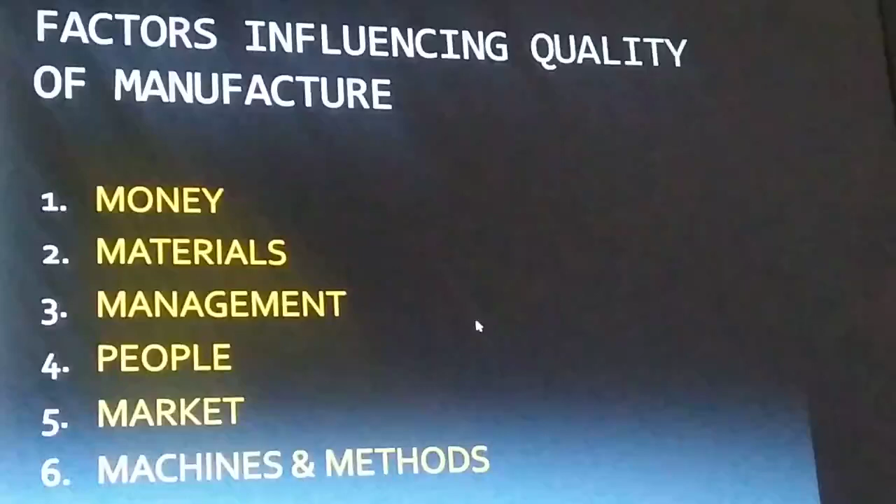These are the 6 major factors that influence the quality of a manufacturing process: money, material, management, people, market, machine and methods. Let us see in detail what is the role of these factors in maintaining the quality.

First of all, money. Money is the most important and essential factor that influences the quality of a product, because money is involved in every stage of production. In this present day of tough competition, companies are always forced to invest a lot of money in maintaining the quality of the product.

Example: automobile sectors, Maruti Suzuki and Hyundai. They are companies producing cars. Maruti Suzuki is economy wise better, and Hyundai quality wise engine parts are much better. So you have to prefer according to the price and also the quality. This all depends on the money factor that is affecting the quality of the products.

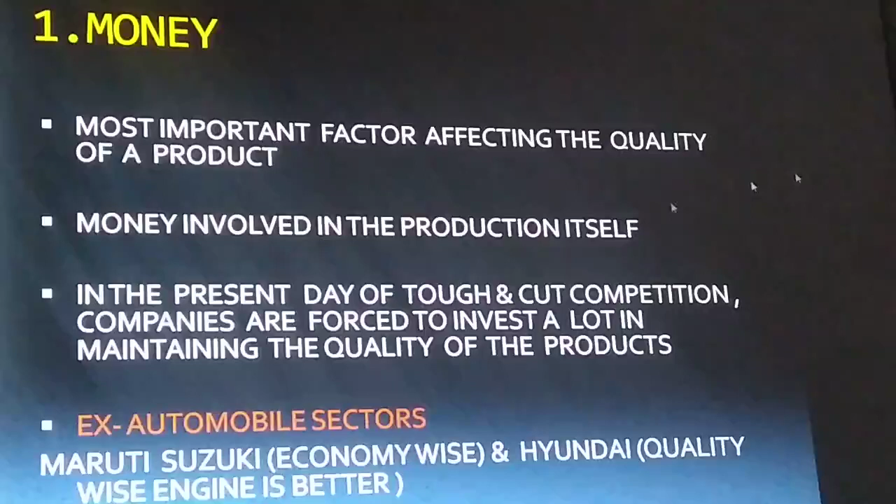Next is material. The raw material is a very important criterion for producing a high quality product, because raw material is essential in every production process. When the raw material is of high quality, then the products are of high quality.

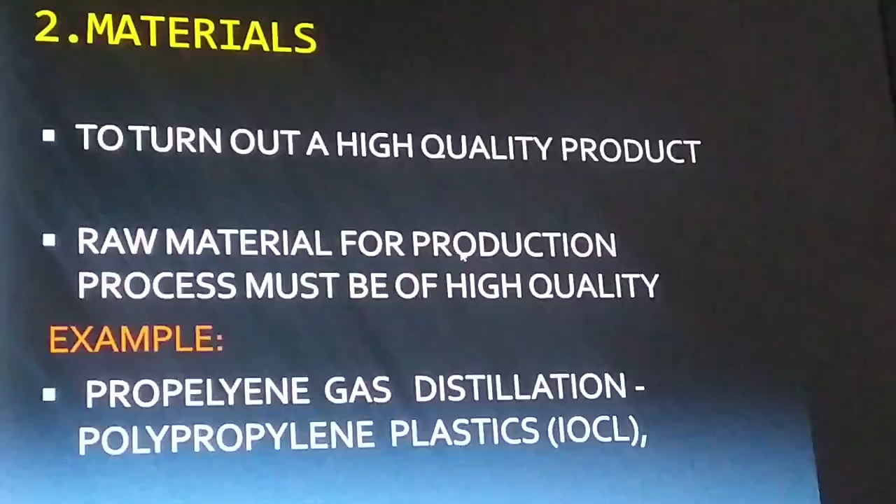For example, Indian Oil is a public sector organization, and it takes propylene gas as the raw material to produce polypropylene plastic. The layout can be given as below: the propylene gas is distilled to form polypropylene, which is a high grade plastic.

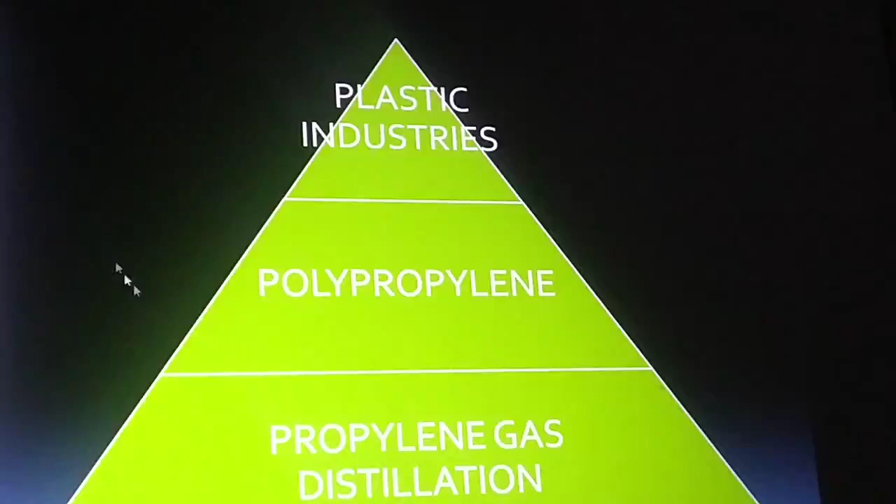Every plastic component with high quality is made up of high grade polypropylene. So propylene gas is the raw material in Indian Oil, and it produces polypropylene as a product, which becomes the raw material for many plastic industries producing household utensils, chairs, tables and similar plastic components. So raw materials should be of high grade quality in order to maintain the quality of the products.

Next, management. Management has a very important role in maintaining quality control and the maintenance of objects. Quality control and maintenance programs should have support from top management, meaning top management should always support maintaining the quality.

The management should be quality conscious, not quantity conscious, because when management supports these quality control programs, the products will be quality specific and the company reputation will be enhanced, so that customer satisfaction is achieved and it will benefit the company. So the management should always support quality control and maintenance programs to maintain high quality products.

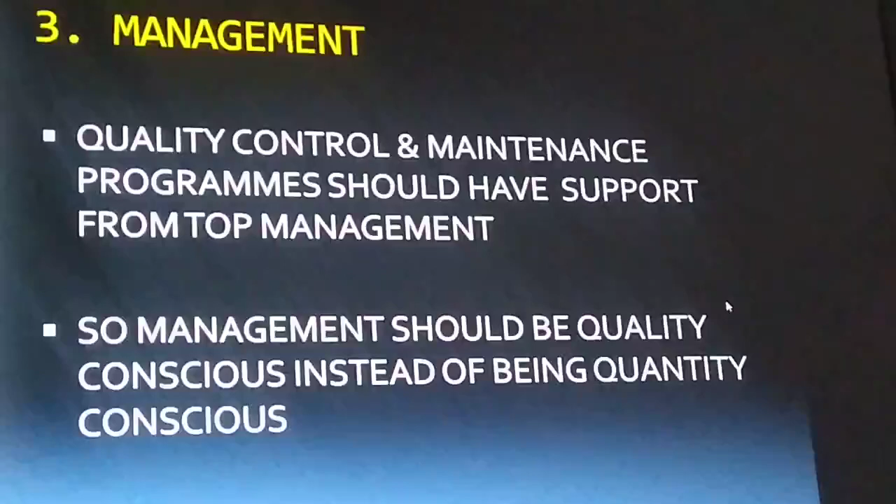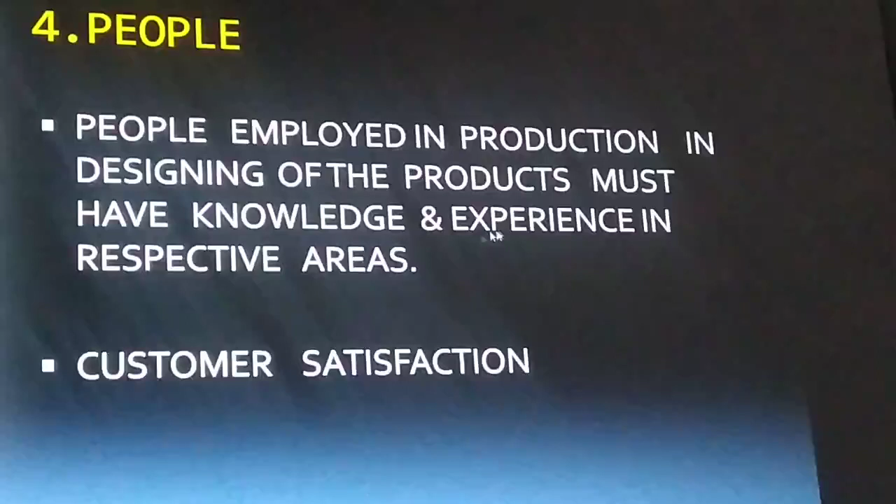Here, people means employees employed in the production process in the companies. The people employed in production and designing of products must have knowledge and experience in their respective areas, because this knowledge, idea, and experience in all the respective areas of production will make high quality products, so the products will be error free. There should not be any error present, and the product will be widely acceptable by customers, so that customer satisfaction will be fulfilled.

Next, market. A market for the product must exist before the quality of the product is emphasized by management. You have to check first whether there is demand for that product or not, and according to that, take the product forward for quality maintenance purposes. For example, there is no demand for AC or coolers in cold climates because we are not using them.

Similarly, there is no requirement of room heaters or woolen garments during hot climatic conditions. So a company producing hot woolen garments, if they set up during hot climatic summer conditions, it may not run. So it depends on market conditions and environmental conditions also to have product demand.

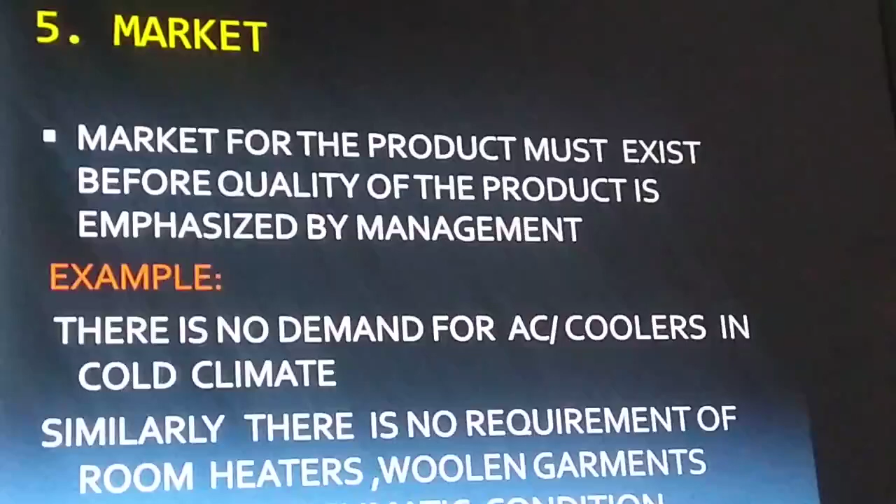So that's why market is an essential factor before going to maintaining the quality of the product. First the market should be inquired about - we should inquire about the market or demand of the product, then we will switch over to the quality purpose of the product. And the next, last one: machines and methods.

To maintain high standards of quality, obviously high upgraded technology is needed, and this is done by new, upgraded machines. So companies always invest a lot of money in new machines, following new trends of technology and new procedures. So machines and their methods play a very important role in maintaining the high standard of quality.

For example, in Bhubaneswar there is CTTC, the Central Tool Room and Training Center, famous for producing very high quality products. Nowadays it is using a 3D printing machine, the most advanced manufacturing process, using 3D printing technology to produce high quality and complex designs of products. Any design you give, it can produce by a layer-wise manufacturing process.

Similarly, different oil refineries use advanced technology to refine oil from crude, like ONGC, Indian Oil IOCL, HPCL, BPCL - all producing refined oil using new and advanced technologies. So these technologies and machine methods are very important in order to maintain the quality of the products they are producing.

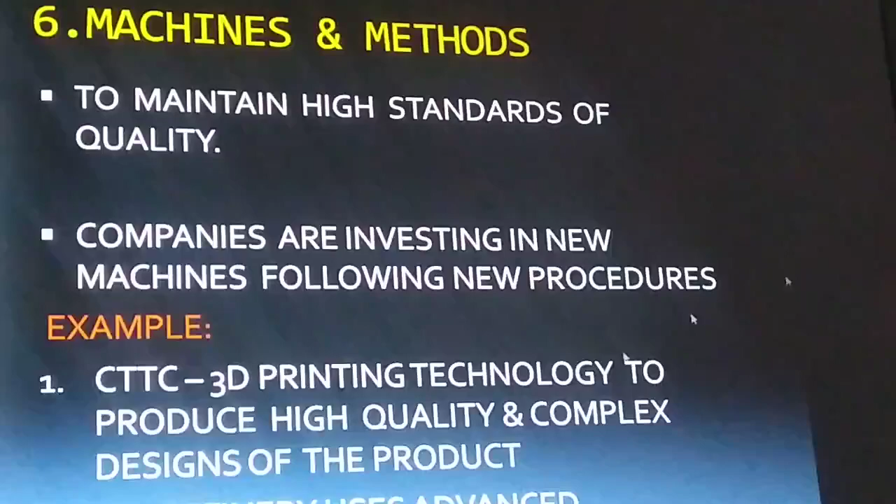So the components - machines and methods - this is a very advanced machine, utilizing advanced and new methods. Machines and methods have a very important role in maintaining the quality of products and also the quantity of products. So all these factors are very much essential in maintaining the quality of the manufacturing process. You have to take care of all these factors while maintaining and producing the products.